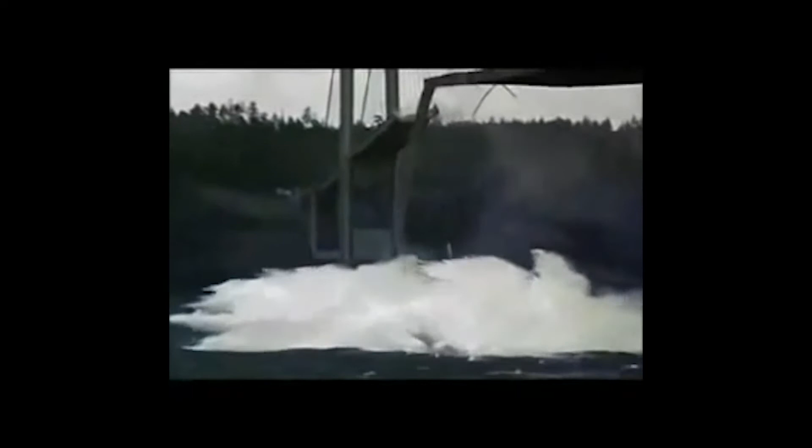Whilst Telford used simple structural diagrams and one-to-one testing to develop his structural designs and theories, Gustave Eiffel embraced modern mathematics and used that to completely rethink and optimize the design of iron lattice structures, in particular the Garabit Viaduct, and of course his tower located in the center of Paris.

From reading about him, you get the feeling that he was incredibly focused on structural efficiency, and stated that the first principle of architectural beauty is that the essential lines of construction be determined by the perfect appropriateness to its use. In the case of the tower, he was stating that its use was to resist wind, and that subsequently, I submit that the curves of its four piers as produced by our calculations, rising from an enormous base and narrowing towards the top, will give a great impression of strength and beauty.

You might get the impression that he was dogmatic and uncompromising in this opinion. He wasn't, and towards the latter stages of the design, he was forced to introduce arches at the base because engineers rooted in masonry construction couldn't believe that such a structure could stand up without arches. You might also think that it was loved. It wasn't. A number of prominent artists of the time completely dismissed the design, and one of them stated that the best place to eat in Paris was the Eiffel Tower because he couldn't see the Eiffel Tower.

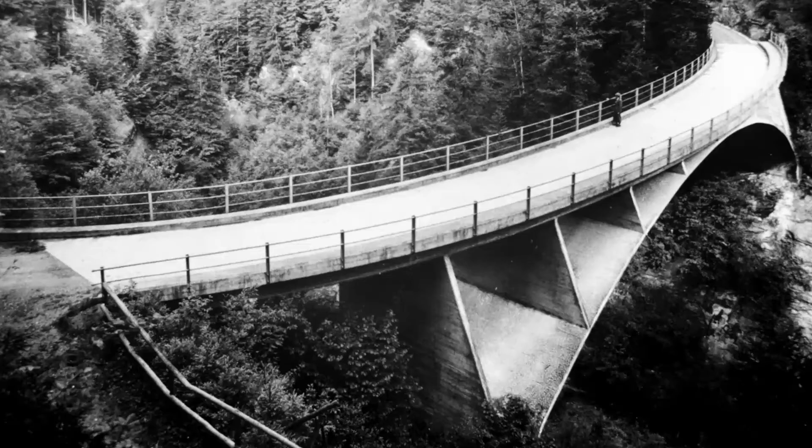Over the course of a number of bridges over his career, he developed the idea of removing all of that material and finally arrived at this stiffened deck that would work to stabilize an incredibly thin arch that would prop off some very thin pillars. He also developed a whole new way of designing these bridges that was completely dismissed by the academic elite at the time, but has subsequently been proven to be accurate.

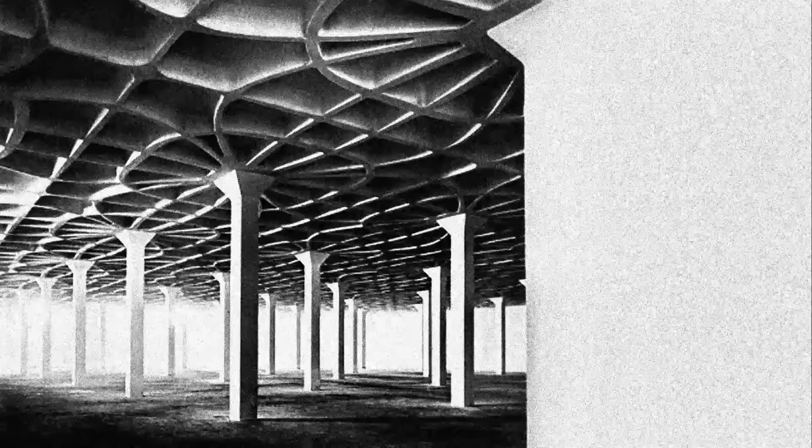There's numerous examples where structural efficiency has driven the design. Gaudi's work using hanging models that directly inform the shape of projects such as Sagrada Familia. Nervi's work looking at the flow of principal stresses and the subsequent results on the soffits such as this. And then Fazlur Khan and the way that he took the structure out onto the perimeter and resulted in projects such as the Hancock Tower, which happens to be my favourite project. And I was lucky enough to spend 3 or 4 months living near its base.

The academic from Princeton University, David Billington, took this idea a little further in his book, The Tower and the Bridge, where he coined the idea of the structural artist and stated that their principles be efficiency, economy, and elegance. He also stated that it was false that beautiful structure demanded the assistance of non-engineering consultants on aesthetics, i.e. architects. Whilst I have some sympathy for his thoughts, I still believe that the best structures come out of close collaborations between different design disciplines.

So that was a brief canter through history and gave me some insight into how structural efficiency has driven the work of the past masters. And now I'm going to talk about some of my work and how efficiency has informed that. As a junior engineer, you join and you start doing an awful lot of beam and column calcs, and it's all essential stuff, but it does get a little bit tedious after the first few thousand. And for that reason, I've always looked at IT and how that might be able to streamline that process. A particular scenario was the Guangzhou Financial Center, which is a high-rise building located in China.

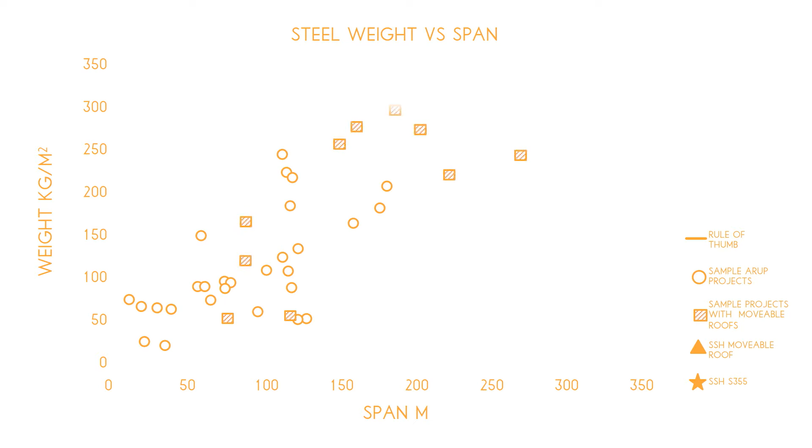Fast forward 7 years and I'm still writing computer scripts to optimize steelwork. The project is Singapore Sports Hub, which is the longest span dome in the world, 310-metre span, and it encloses a new national stadium for Singapore and supports a movable roof that opens and closes in order to expose the pitch below. When considering these projects, you get an awful lot of challenge from your contractors and clients about the efficiency, and you generally talk of efficiency as the kilograms per metre squared required to achieve the span.

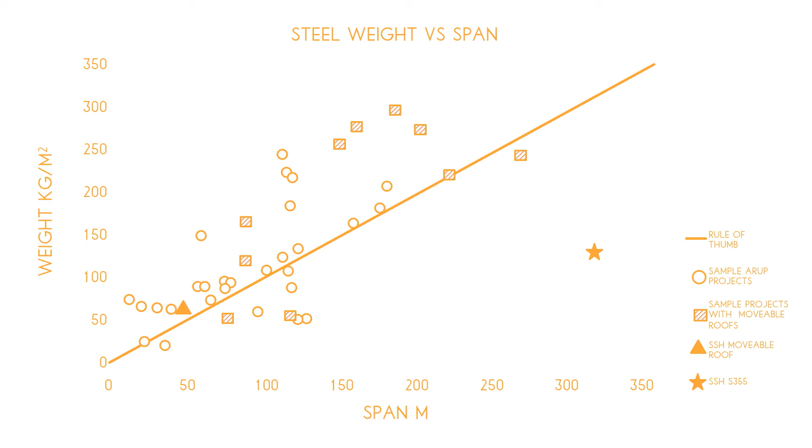This graph shows the kilograms per metre squared for numerous projects at both Arup and other consultants. And the typical rule of thumb is that for every metre of span, you require an additional 1 kilogram per square metre of steel. You can see, therefore, that the 300-metre span of Singapore Sports Hub would theoretically require 300 kilograms per square metre, and we were able to deliver it for closer to 120 kilograms per square metre.

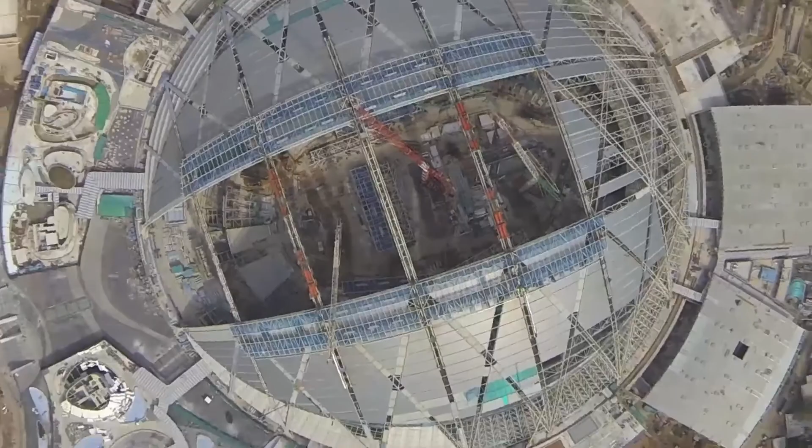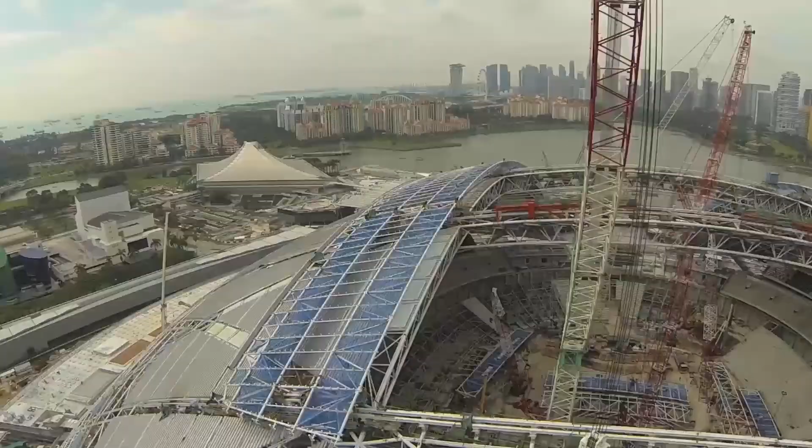There's numerous reasons as to why this is. The form of the stand follows the structural pattern and provides a shell structure which is efficient. We undertook extensive analysis of the wind tunnel testing and took advantage of the aerodynamic shape of the dome. And also there's a kilometre-long post-tension ring beam that provides a very stiff support for it, which is fundamental to get efficiency out of projects such as this.

However, one of the key reasons we were able to provide the tonnage we did was due to the software that we wrote that took all unnecessary material out. The vast majority of material in these roofs is primarily there to hold itself up, especially in benign environments such as Singapore, where wind and seismic forces are low.

The software allowed us to optimize the design, consequently reduce the steel, which would allow us to reduce the loads, which would allow us to then further optimize the structure. And this positive feedback loop, along with cloud computing to deal with all of the wind loading, allowed us to take all the unnecessary material out of the structure. This is an image of it looking back towards two other Arup projects, the Flyer and Marina Bay Sands.

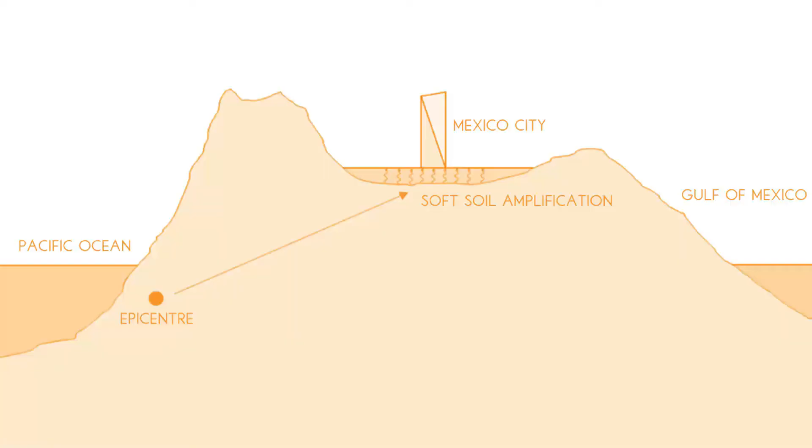In seismic buildings, you need enough strength to carry the forces induced by frequent earthquakes, but at a more extreme event, you need a predictable way of absorbing the energy and resisting collapse. We found that by adjusting the software that we had written for Singapore Sports Hub, we were able to reduce and remove all of the unnecessary strength out of the building, primarily located within the bracing structure along the perimeter. By doing that, we were reducing the forces imposed onto the building, which would allow us to further reduce the size of those elements.

When compared to the benchmark design, we saved nearly 1,000 tons of steel, which in terms of local cost was about $3.5 million. So that's a brief look at some of the work that I've done, and now to look at how the future may change and how structural efficiency may inform it going forward. I like this quote from William Gibson, that the future is already here, it's just not evenly distributed. And I think that's particularly apt to our industry.

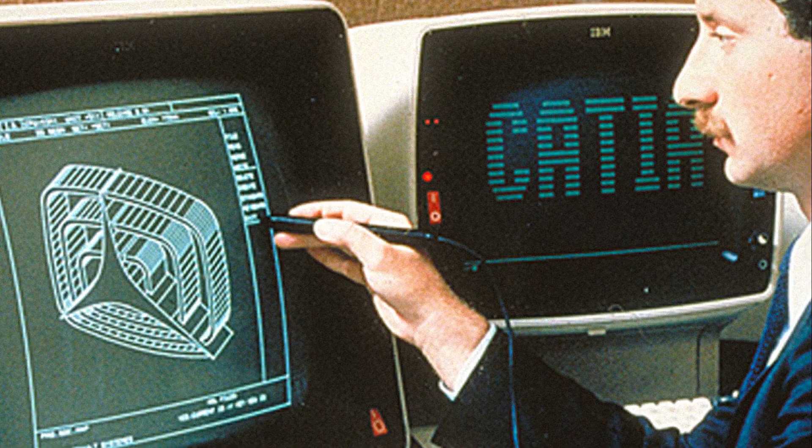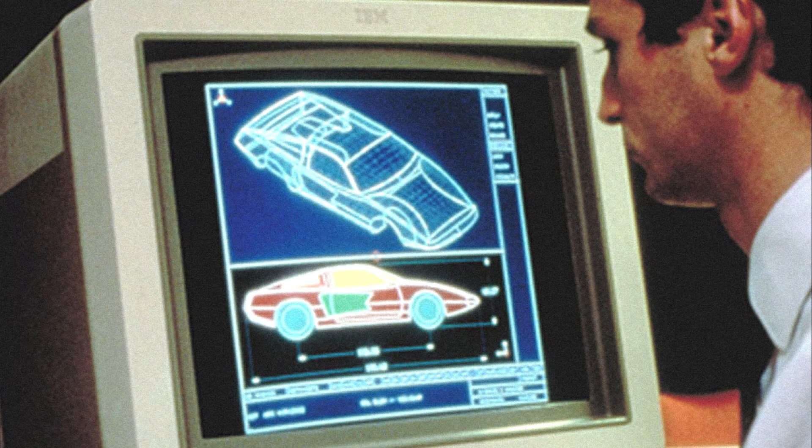If you go back to the 1960s, 3D software was developed for the aeronautical industry. By the 80s, they were using this for designing complex structures and doing multidisciplinary coordination for projects such as the Boeing 777. But yet, we've only really been adopting that in the last 10 years within the built environment and our work on BIM modelling. I'm always interested in looking at both aeronautical and automotive because there's always that drive for efficiency of materials, and so it kind of strikes a chord with me.

In terms of the automotive, I've been interested through this talk to look at how they use different materials. So a typical chassis in a car may use 5 or 6 different grades of steel. In terms of the whole car, you might have 100 different grades of steel, with the higher strength elements in just those areas where they're not expected to absorb much energy, and the lower strength, high ductility steels located in areas required for energy absorption in the event of a crash.

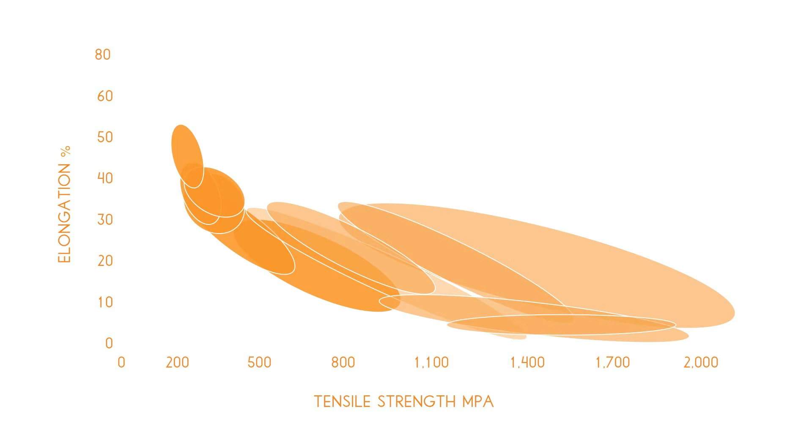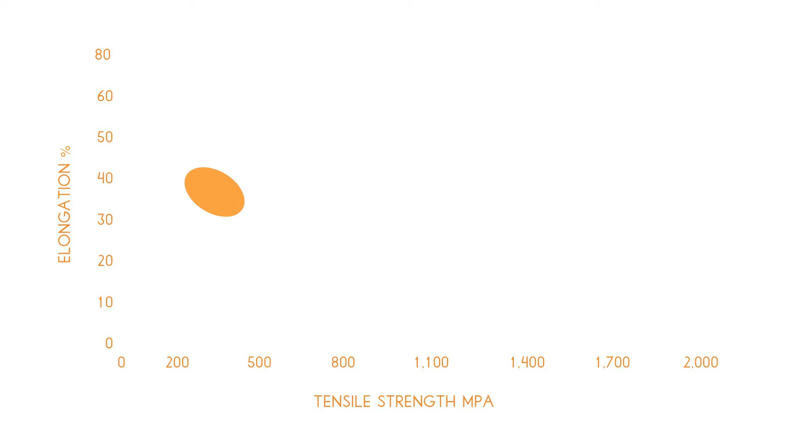Not only do they optimize the distribution of different grades of steel, they also open themselves up to a vast range of different grades. So this has strength on the x-axis and elongation on the y-axis, and these are all the grades that the automotive industry tend to use and are focused on. This is what the construction industry uses, which I think is a bit of a missed opportunity. And there are examples, specifically in Japan, where they're using 1,000 MPa steels, but they're also using fire-resistant steels that don't require intumescent paint. But there doesn't seem to be that pull or push within our market in order to bring those to fruition.

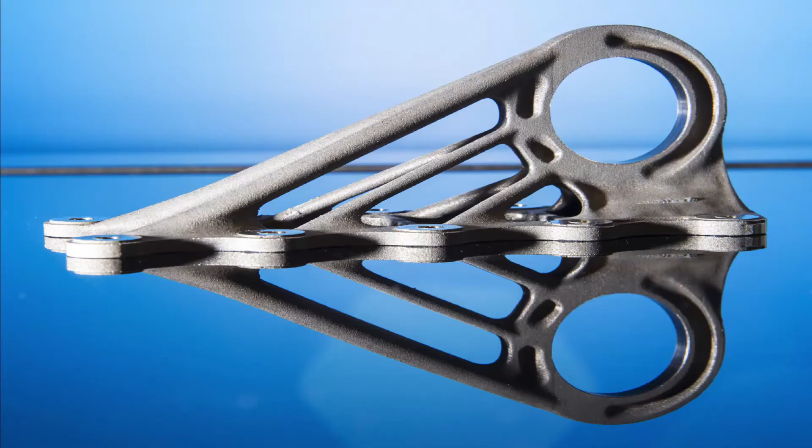The other interesting thing was to look at how production has changed, specifically in the aeronautical industry, where now about 25% of their componentry is made through 3D printing. This is a typical bracket taken from an Airbus.

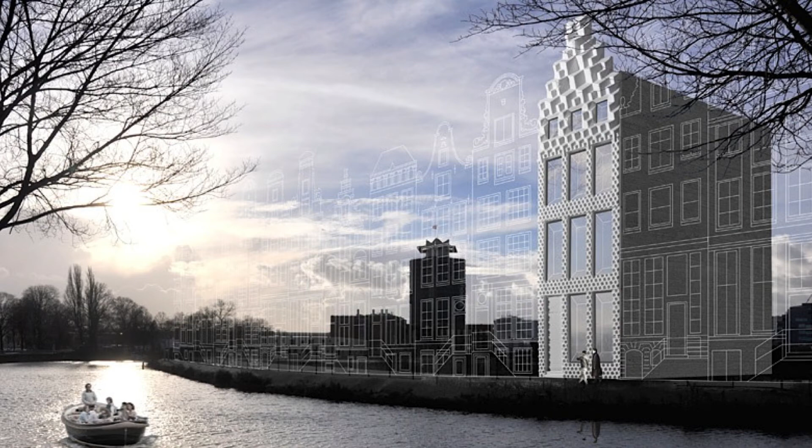And there does seem to be a trend of this gaining a little bit of traction, but very slowly within the construction industry. This is a proposal in Amsterdam for a 3D printed house, which is apparently going to happen. But through a bit of research, I have found that in China they've already built a 5-story house, and they did so in 24 hours using a 3D printer. So this technology, if that is true, has some significant benefits.

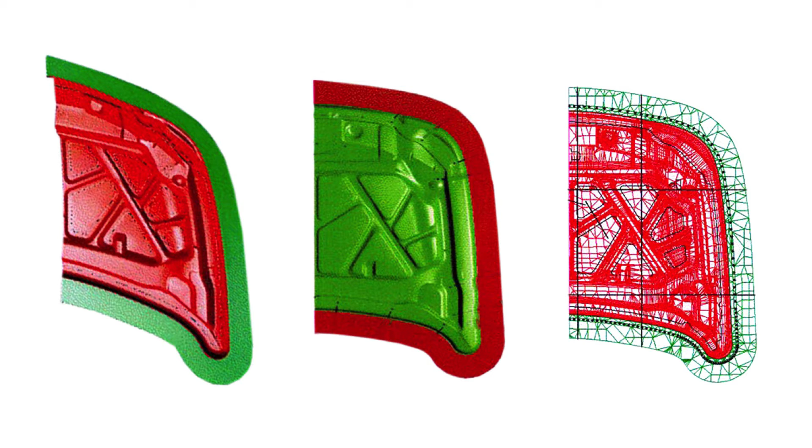Finally, I've been interested over the last few years in looking at the design processes that seem to be adopted in these industries. So a car bonnet may be prescribed or at least informed by some very complicated genetic algorithms that optimize the amount of material until everything there is required purely for structure.

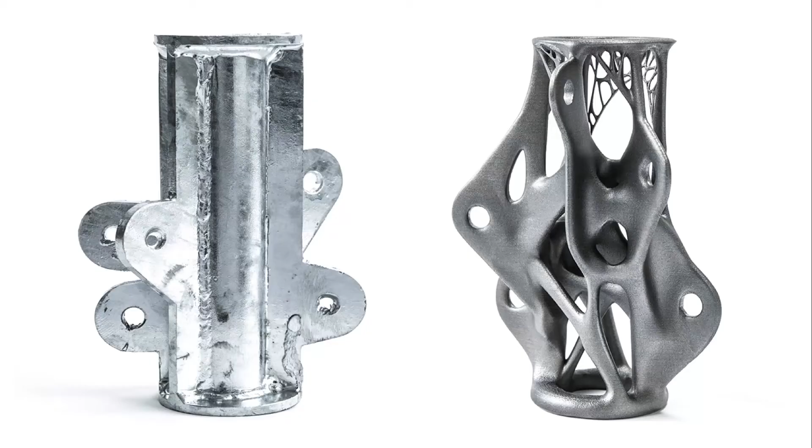We've done a similar study. This is a typical node, work we've done with Delft University. This is designed in a conventional manner and fabricated in a conventional manner. This uses some complex genetic algorithms to derive its shape and then a 3D printer to deliver it. I don't think we'll be doing those imminently, but this logic may start to come to fruition over the coming years.

So as a little summary of how I see the future panning out, I think we've still got some way to go with higher performance materials. Concrete has come on leaps and bounds, but steel, 10 years ago we were using S355, we still are. I think we'll see that improving, hopefully.

If 3D printing really can work at a building scale, and it is shown to have the program and cost advantages, then it may change the focus on material efficiency. It may make us more interested in optimizing our materials, and that might drive us towards some of the strange optimized forms that I showed at the end. Finally, I firmly believe that structural efficiency leads to better engineering and better buildings. Thank you very much.